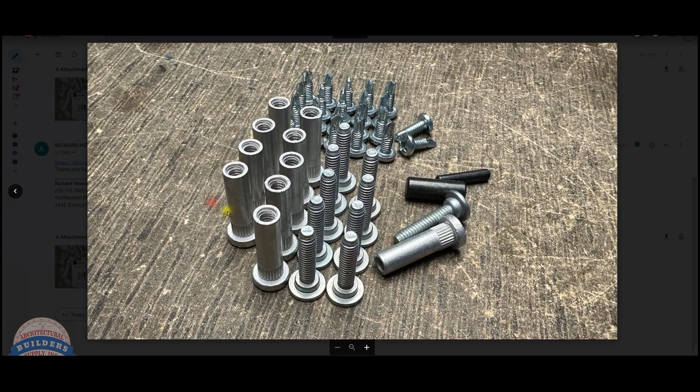Okay, here is the item that we are looking at. Let's take a look at some images that we have here. Let's start at the beginning of the images. There's the packaging and the back side, showing you all of the screws and fasteners that are there, the sex bolts, the self-drillers, the 2 installation aids. There's one piece of it there. That's everything out of the packaging. And then just different perspectives on that.

So the question is what hinge does this go with? I don't know. Let's take that part number and let's copy it. Let's open up the manufacturer's page in our site, which is here. And then if we were to scroll down and get to the product catalog, I'd be surprised if this part number was in the catalog, and it's not. Let's try the price list, which is far more common.

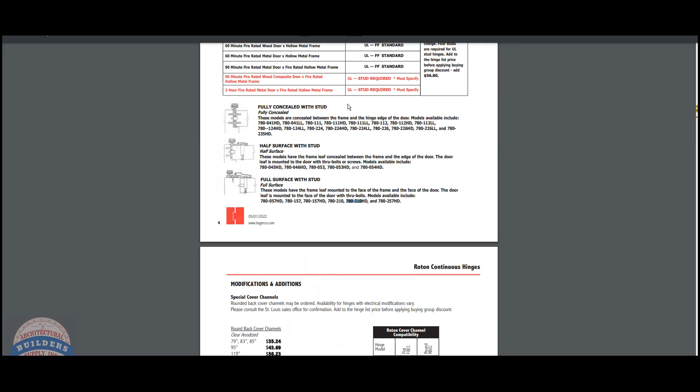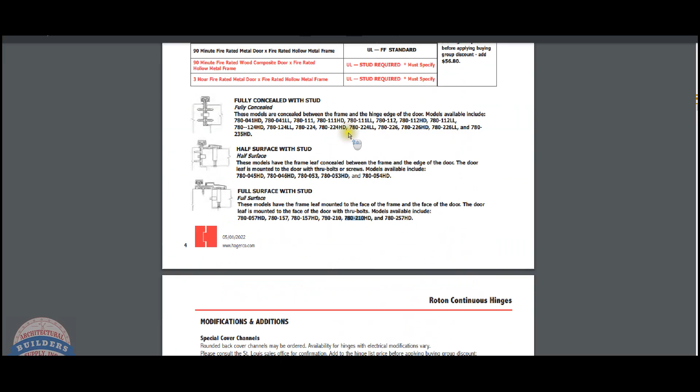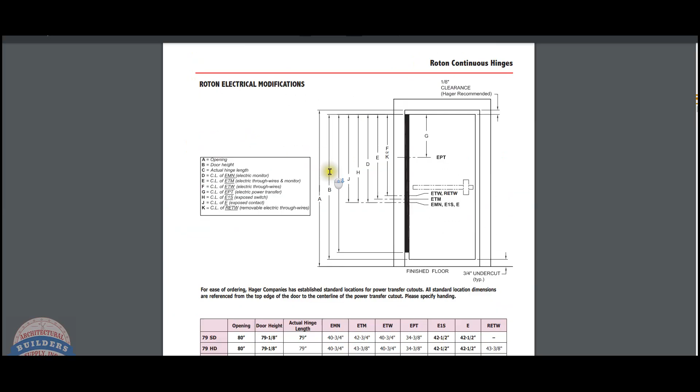Okay, let's open that up. Let's search there. It's not there either. Roton. Let's start with a 780-210 and see. Yeah. Okay, here's the Roton section. Discussing the different types of hinges. Electrical modifications. Replacement moldings. Okay, so replacement moldings for different hinge types.

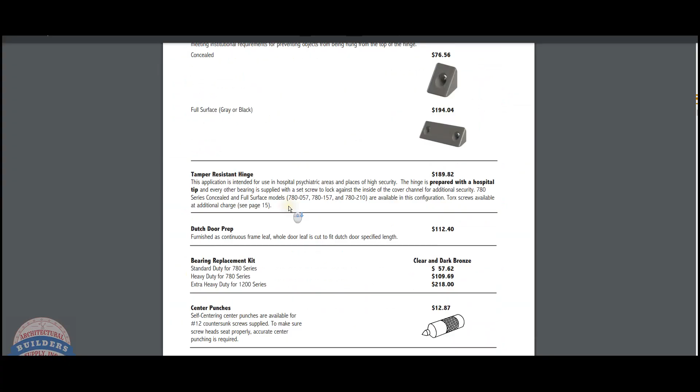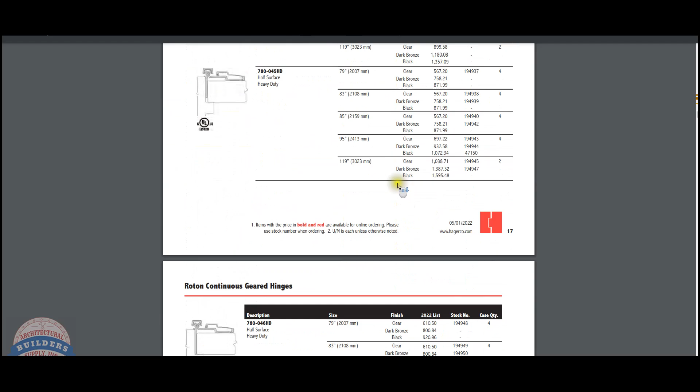Additions, accessories, replacement parts, fasteners. Okay. Fasteners. Yeah, I don't see this package anywhere here. Now they list the different hinge models. Okay, so we have a mystery here in terms of what we're dealing with.

These are the different part numbers, or the different screws that are included. It has to be either a half surface or a full surface, because we have the sex bolts. Here they are. Sorry, right here. And then we have the 12-24 by 11/16 self-drilling panhead screw. That's for sure what's the other screw that's there. But they're not giving us anything else.

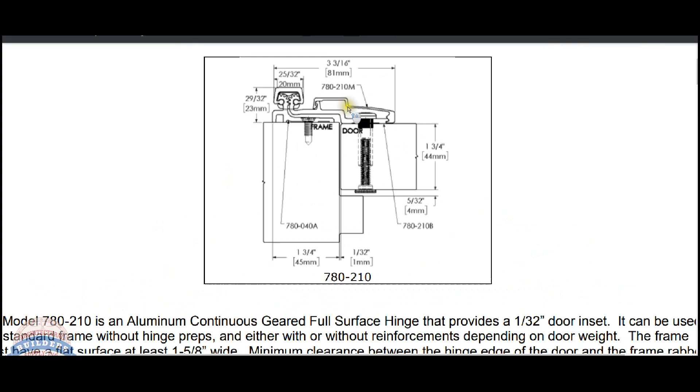So let's do this. Let's take a look, because this could very easily be the screw package for a 780-210, the common hinge. And installation instructions, let's take a look at that first. Yeah, this is probably it. Well, it may be. Oh, you know what? I don't think it actually is. It's got the wrong head screw for a 780-210. It must be for a different model of hinge.

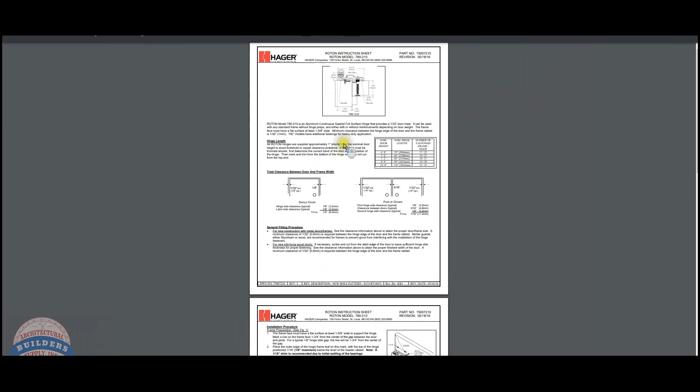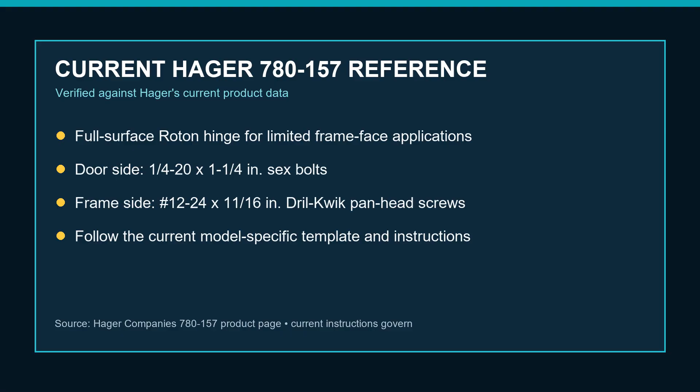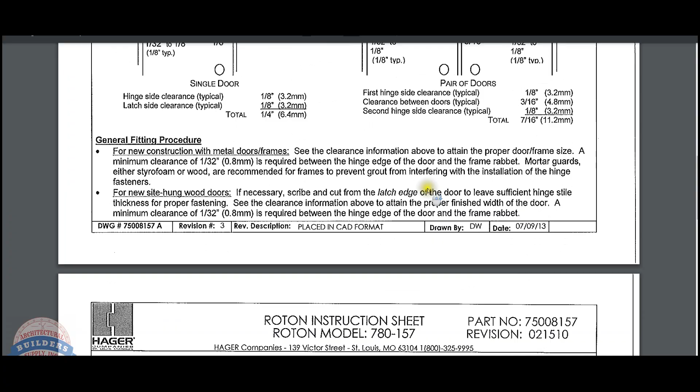So let me pause this video and I'm going to call the manufacturer and find out what model this is from. Okay, so the 780-157 is a great, perfect example. It's the reason I had an idea it was the narrow leg model, because I know that has a taller cap on it, and that would allow the panhead screw to fit underneath. So you're going to have a number of these. Then of course you have those studs. And the question becomes, what are those two studs for?

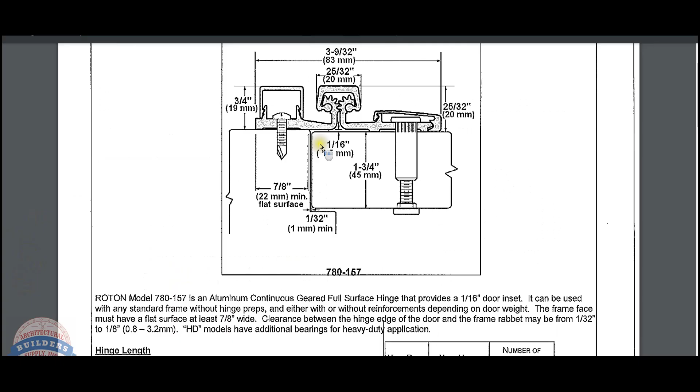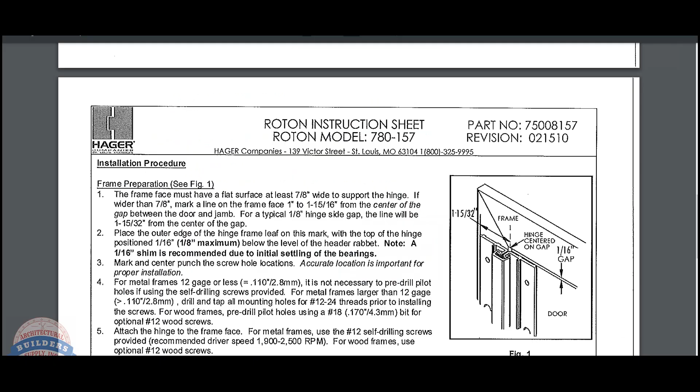Let's take a look at that. And while they don't show an image of those studs, what they are is center punches, actually. And the reason that they include the center punches with the hardware is because it's that important to get the screws perfectly located. So you've got this small piece of metal with a point on it that's going to literally go through the preparation, small little point here and here. These will go right through the preparation for the hinge leaf itself, whether it be on the frame, which is going to be the smaller of the two, or the door for the through bolt. You can get that idea here, obviously.

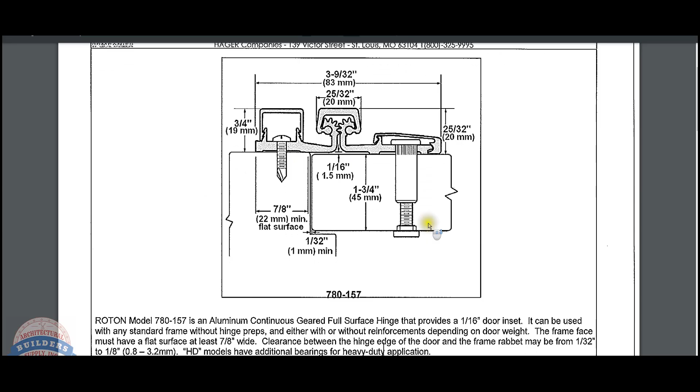You get the hinge applied, and what I would do is I get the hinge put in place and get the door shimmed in place. I get the hinge exactly located where I want it, following the instructions, and I would mark two holes. I would mark one at the top, and what I do is at the top of the frame and the door, I make sure that they're exactly where I want them. I get the hinge laid down on the face of the door, and then I mark the bottom, or I'll mark maybe halfway through, and then I will go through and punch, and I will drill the rest.

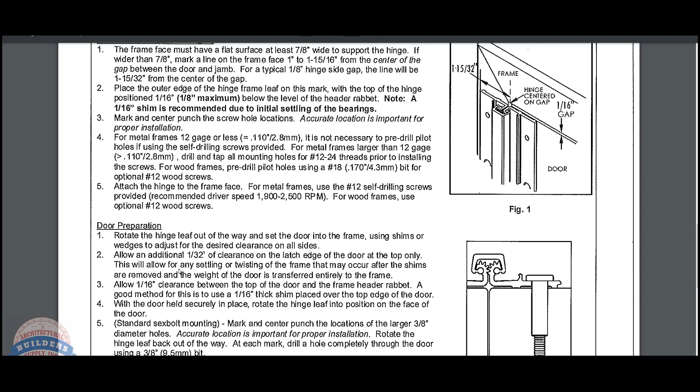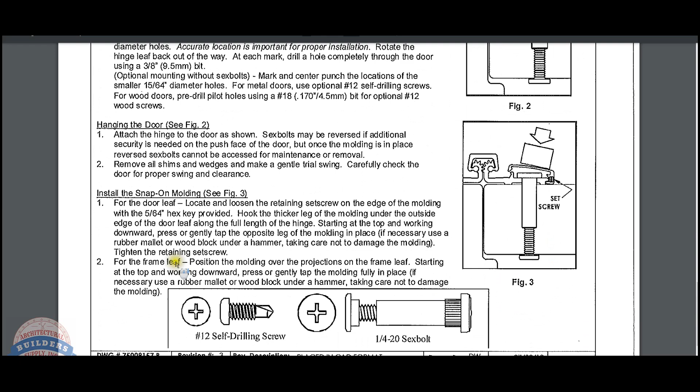Obviously, using a center punch and a hammer on a glass aluminum storefront door is something you need to be very mindful of. All you need to do is give yourself a small target for your drill bit to start, and that's when they refer to center punch. They're talking about those pieces of metal that are in there. Mark and center punch the locations. The size of these are exactly correct for the material. So that's what this screw package is for. Hager said it's only for the 780-157. That makes sense to me.

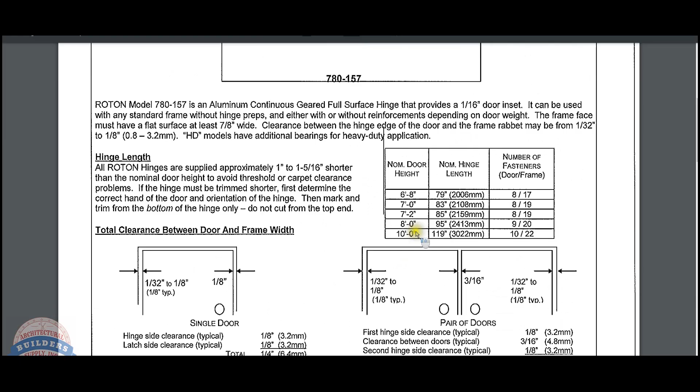The small blind head, that's underneath the cap of the through bolt through the door, and then that's underneath the leaf on the frame. And if you recall, we showed where there were listings for the dress covers. In order to get to the head of that screw, you've got to peel that off. You've then got to remove about 22 screws to get that out. I had a client ask me earlier this week if that was secure. Well, you know, I've never heard of someone peeling a hinge off like that. This cap does not come off willingly at all. And you really have to be working on the door in order to get that peeled off.

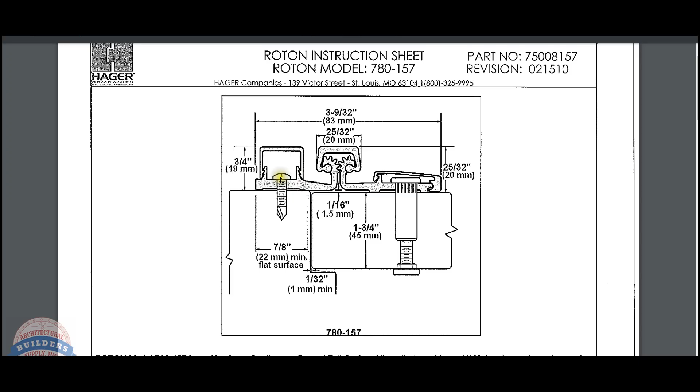I suppose if you were concerned with it, you could do a Torx type of screw out there, or you could, with your countersink, smear out those number 3 Phillips drives on the outside. I've never heard of someone getting in by peeling that hinge off, that cover off.